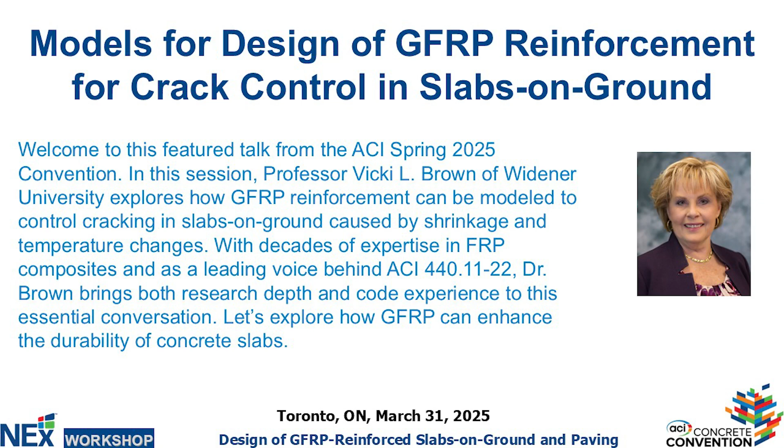I have got to confess two things. Okay. First of all, I am no expert on slabs on ground. I am also no expert on cracking in concrete. So design of GFRP reinforcement for crack control in slabs on ground. What in the world is she doing here today is probably what you're asking. And I kind of wondered myself too.

But what I want to try to do is maybe provide some food for thought, some ways to think about what we have, what we know about use of GFRP reinforcement, and I will admit having some knowledge in that subject, and how can we take what we know about GFRP reinforcement and apply it for crack control in slabs on ground.

There are examples out there. There hasn't been a lot of definitive work done to quantify what we're seeing, though that is starting to change. And I think that maybe you had a speaker this morning who addressed that a little bit.

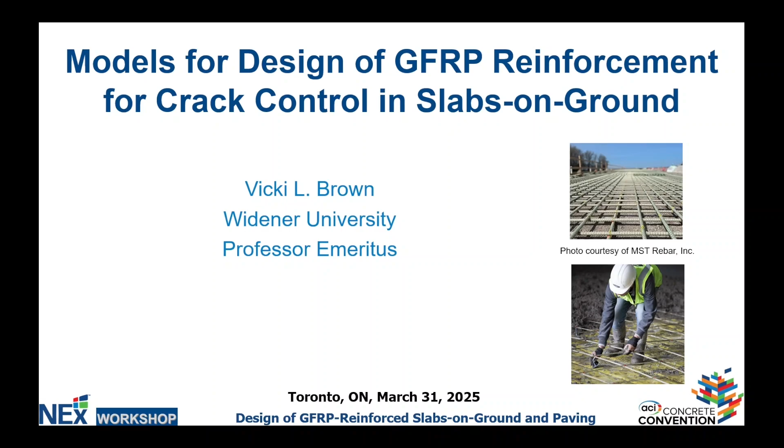Let's see if I can get this to work. Which way does this go? Am I holding it wrong? Hold on. Oh, that's the pointer. You know what? It'll be easier for me to just work from here. Which one? That one. That's counterintuitive for somebody who's left-handed.

Okay. So the first thing I'll say is, not being an expert on slab on ground, where did I go to the experts? And the expert knowledge is in 360, the ACI Guide to Design of Slabs on Ground. And I am going to be fairly narrowly focused here. I am looking at material related to unreinforced slabs, where we want the cracking to occur beneath the saw-cut contraction joints, or where we're maybe lightly reinforcing, and by lightly, 360 says maybe 0.1% steel across the joints to enhance the aggregate interlock for load transfer effectiveness.

And then I'm also going to look at those slabs that they categorize as being reinforced for control of crack widths. And those slabs are designed to remain uncracked under the design loads. The guide recommends reinforcement maybe in the neighborhood of 0.15% steel with closely spaced contraction joints, but they don't want the reinforcement to be continued through the joints because that can tend to, especially with steel, with its high stiffness, lead to cracking in other locations of the slab. And right there I point to where maybe we have one advantage with using the GFRP reinforcement, because we're not going to provide that same stiff resistance.

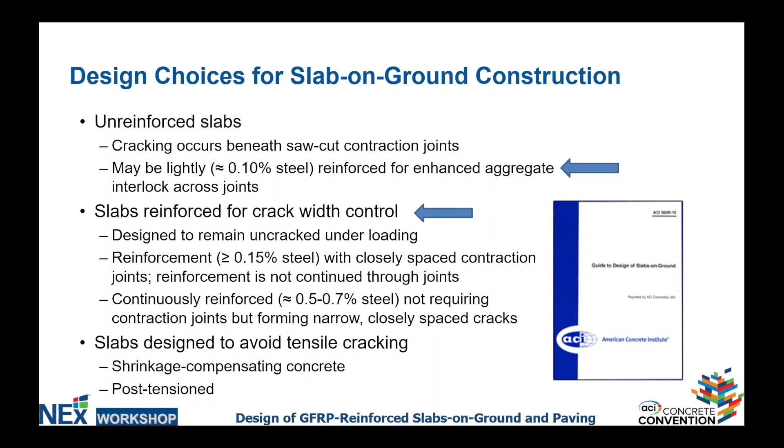I'm also going to look at what they call continuously reinforced slab, where PRC 360 suggests 0.5 to 0.7% steel, okay? This would be slabs on ground where you're not requiring contraction joints, and you provide the reinforcement to form narrow, closely spaced cracks. So that's kind of where my focus is today, where you see those two blue arrows. And I wanted to take a look at what guidance we have from our code, 440.11, and from the 440.1 guide on use of FRP reinforcement to come up with maybe a suggested approach for how we can address control of cracking in these slabs on ground.

A couple things here. Looking in what PRC says, I think it's important to note that the 360 guide makes clear that properly placed reinforcement, even when it's used in suitable amounts, is not going to eliminate cracks, okay? The idea is to reduce crack widths to what are acceptable levels, and the 360 also makes clear that joint spacing, slab thickness, and the reinforcement requirements fall on the designer. Those are the designer's responsibility.

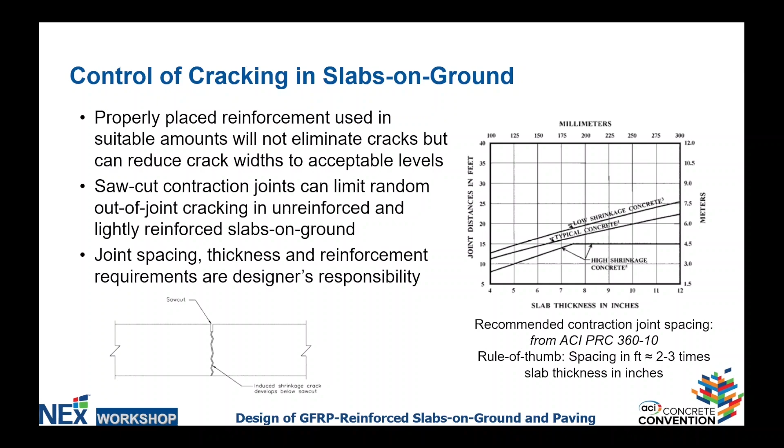To aid the designer, they provide now in the 360 guide the little chart I have shown here that indicates that depending upon what your slab thickness in inches would be, and that would be chosen based on your design loads to make sure that you don't crack your slab under those loads. Once you've done that, one can figure out then, depending upon the type of concrete you're using, slab thickness, about what spacing you need for your joints. Used to be they provided a rule of thumb that said, hey, joints should be spaced in feet, about 2 to 3 times the slab thickness in inches.

Some other guidance from the 360 guide. Note that if we're talking about reinforcing for crack control, that reinforcement should be placed in the top of the slab. In fact, I think they say upper third of the slab. The use of bottom reinforcement may actually increase the cracking that we see because it's going to create additional restraint in the bottom of the slab.

They also note that your load transfer effectiveness by aggregate interlock, okay, it's going to be inversely proportional to the width of the joint opening and the load magnitude, but directly proportional to slab thickness and going to depend upon square root of the subgrade modulus. The suggestion in the 360 guide is that if your joints are limited to about 25 to 35 thousandths of an inch, 0.6 to 0.9 millimeter, if that's the biggest your joint openings are, you should be able to efficiently and effectively transfer your load by aggregate interlock under most conditions.

A caveat to avoid continuing larger percentages of reinforcement across contraction joints. An example of this would be using the 318 0.18% temperature and shrinkage steel requirement. If you continue that through your joints, you may experience random out-of-joint cracking because that reinforcement coming through the joint is going to restrain your joints from opening, and the cracks are going to form, but they're going to end up forming maybe somewhere where you don't want them to form.

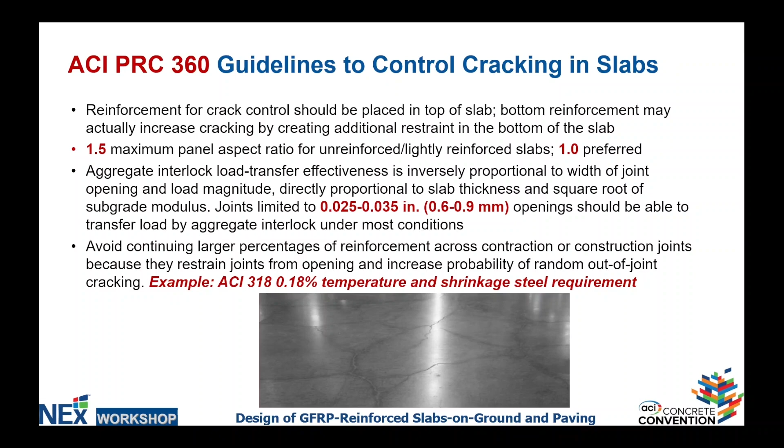All right, some other recommendations that we get out of 360. I found it interesting, and jumping ahead a little bit, the 440.1 guide for use of FRP reinforcement has an appendix for slabs on ground. And that appendix makes use of the traditional subgrade drag formula, SGDF, but I find that it no longer shows up in the 360 guide recommendations.

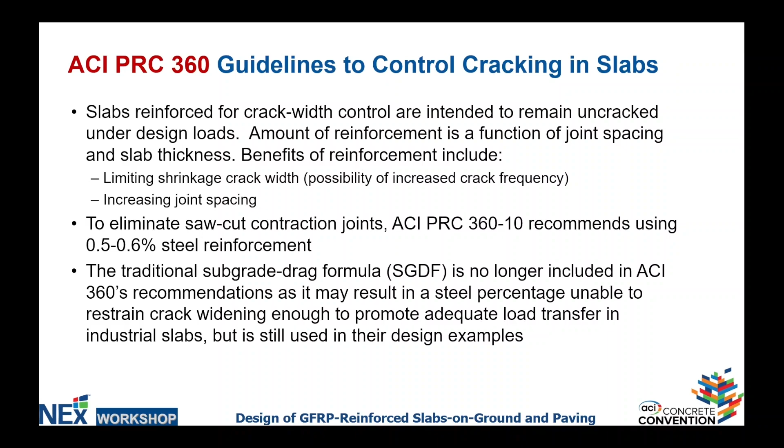The explanation I was given for that is because it may result in steel percentages that aren't able to restrain crack widening enough to promote the load transfer we need. But yet, when I look at the design examples that are in 360, all the design examples are based on that subgrade drag formula. So go figure, I don't have the answer to that one.

Where I get my information, by and large, comes from these documents: the 440.11 building code requirements for structural concrete, and the 440.1 guide for the design and construction of structural concrete. The first one, the code, is limited to GFRP bars solely. The second, the guide, covers other types of FRP bars as well. And the guide includes additional background in an appendix with recommendations for using FRP reinforcement in slab on ground.

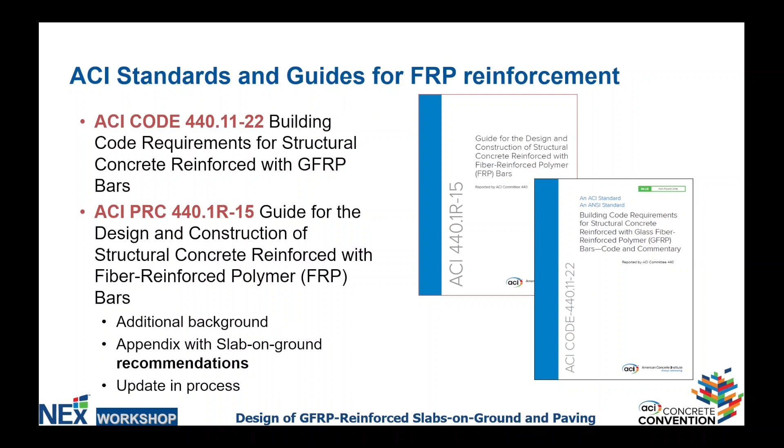That guide is currently in the process of being updated. I cannot tell you what's going to happen to that appendix when that update is completed, whether it remains, changes, or goes completely away. The other thing I point to briefly is that the nice thing is that ACI code 440.11 is now in the International Building Code in the 2024 version of it.

But please note that 440.11 is very specific that it does not cover slabs on ground. And we see that there in the 1.4.8 provision: this code does not apply to design and construction of slabs on ground unless the slab transmits vertical loads from other portions of the structure to the soil.

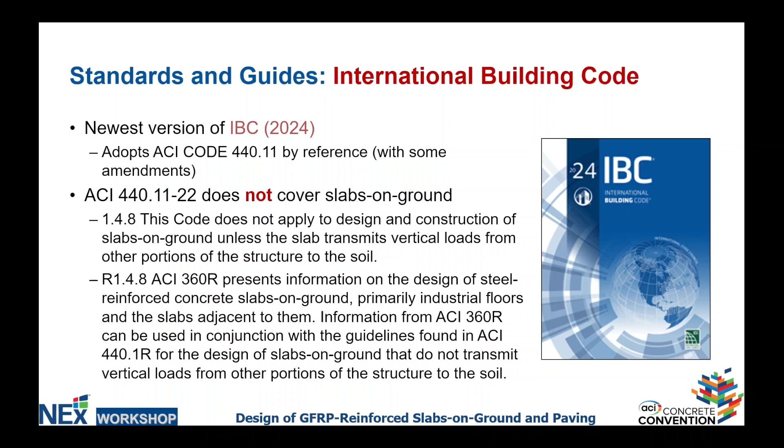So it's not part of the building code requirements, but that doesn't necessarily mean we can't borrow things from it to address what we're trying to achieve with slabs on ground. And in fact, if we take a look in the commentary, 440.11 points you to the ACI 360 guide for slabs on ground that can then be used in conjunction with the guidelines found in 440.1 for those designs. So what information can I get out of the code and the guide?

And I'm first of all going to go look at that shrinkage and temperature reinforcement, okay? Because when we apply it in beams, one-way slabs, structural slabs, we're using it with the intention of limiting our crack width. The reinforcement ratio we use is right here, that's equation 24.4.3.2. There's the reinforcement ratio with GFRP reinforcement.

If I'm using the lower modulus bars with an Ef out of 7957 of about 6,500 ksi, I'm going to get a reinforcement ratio of about 0.003 from that. If I'm using higher modulus bars, that's probably more like about 0.0023, to give you some context for how big that ratio is. And we do apply it to the gross concrete area, as is done with the steel reinforcement ratio for temperature and shrinkage resistance. Here, though, bar spacing is limited to the lesser of 3 times the slab thickness and 12 inches.

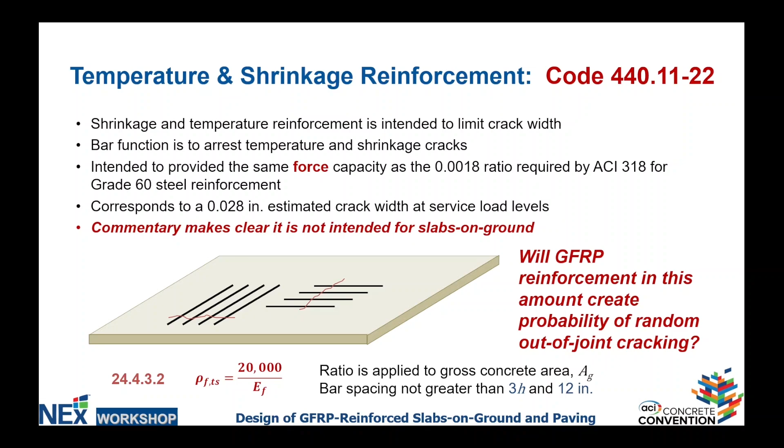The question that we need to answer, and I don't know that it's been totally answered yet, is will GFRP reinforcement in this amount create the probability of random out-of-joint cracking when you put it through the joints, the way steel reinforcement at 0.18% will do? No definitive answer yet, but from the couple of studies I've seen, there certainly is the possibility that the answer to that will be no. We're going to get the cracking where we want the cracking, which is in the joint.

Another equation we can get from Code 440.11 that will be helpful to us is how we space our GFRP bars for crack control. If we take a look, these equations here, 24.3.2a and 24.3.2b, come right out of Code 440.11. They have been calibrated to provide a 0.028 inch, or 0.71 millimeter, maximum crack width. Now those coefficients, the 0.032 and the 0.026, can be linearly adjusted to impose a more restrictive limit if the designer felt it was necessary.

The 0.032 actually comes from 1.15 times the maximum crack width you want to accept in inches, and the 0.026 is from 0.92W. So this equation could be adjusted. I don't think I would adjust it higher. I don't think I'd make my crack width bigger than that 0.028 inches, because remember, we want to maintain aggregate interlock. But if you wanted a tighter design, they can be adjusted downward.

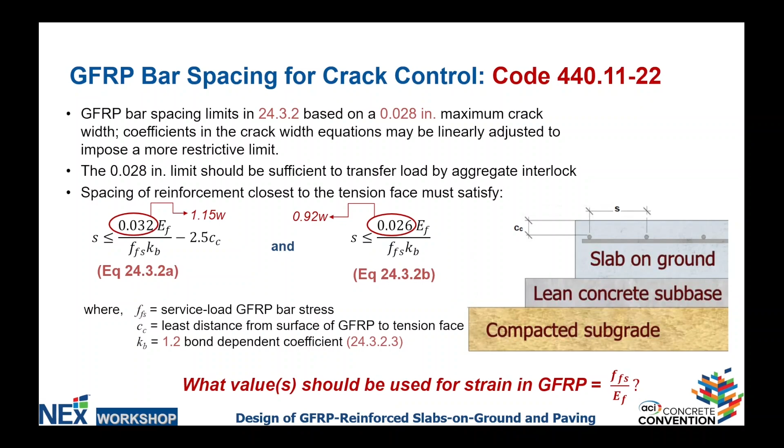What else do we have in this equation? We see what looks to be the service load GFRP bar stress. We've got to decide what that is. But in reality, we don't really have the bar stress there. If you take a look, the numerator has the tensile modulus and the denominator has the bar stress. So in effect, we're dividing by strain in these equations, which brings the next question. What value should we be using for strain in the GFRP if we want to use this to control shrinkage cracking in our slabs on ground? What value do we go with?

There are several different recommendations that one can look at. We want to limit that reinforcement strain, and the approach that was taken in both Code 440.11 and in the ACI 440.1 guide for FRP reinforcement is to limit that strain to 0.0012. Where did that come from? It corresponds to the strain you'd have in steel when that steel is at a service load stress of about 0.6 Fy, and typically when we're designing with steel, we'll say stress in the steel under service loads is going to be around 0.6 to 0.67.

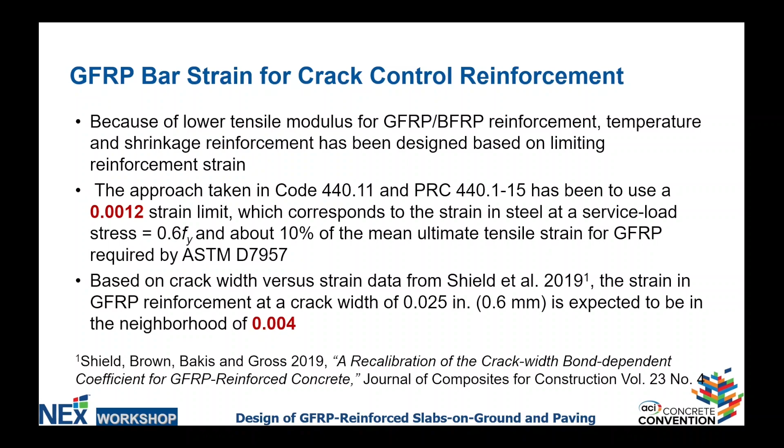So that's one choice. The other choice would have a much larger strain that could be used, and I wouldn't recommend that without there first being additional test results to back it up, but the strain would be expected to be in the neighborhood of 0.004 if your crack width is at 0.025 inches.

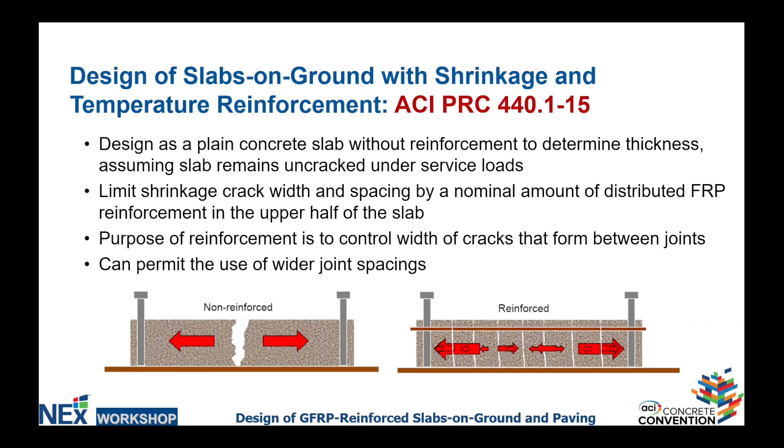And then if I get into what we've got in the guide, the equation they use is the subgrade drag formula, which looks something like this. If I adjust that with a strain of 0.0012, assuming a coefficient of subgrade friction that's recommended at about 1.5, I get an expression for the area of reinforcement I want to use to control shrinkage, what we see here with a coefficient of 625. If I use that 0.004 strain, that coefficient would be much smaller.

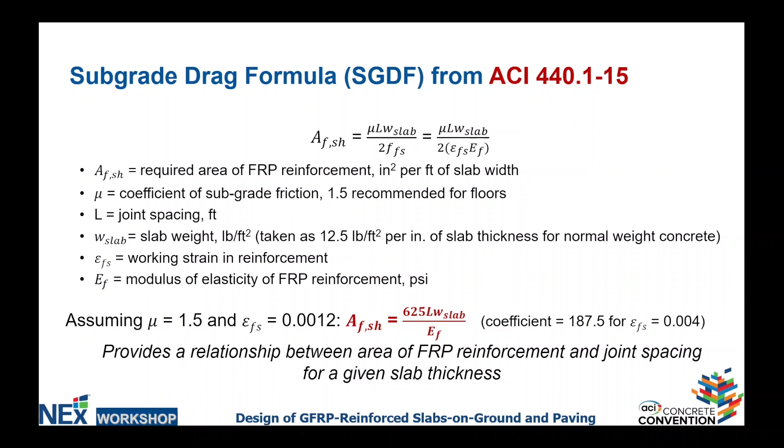So what can I do with this? Well, I think it provides for us a relationship between the area of the FRP reinforcement and joint spacing for a given slab thickness. If we were to take that 625 area, convert it to a reinforcement ratio, and set it equal to the temperature and shrinkage reinforcement ratio from the code for GFRP bars, it implies that FRP reinforcement in amounts equal to what is specified in Code 440.11 might be usable for slabs on ground with joint spacings up to 30 feet.

Now that's great, right? We can space our joints further apart, we cut down on maintenance costs. But I would say that if that were to be done, that reinforcement should be chosen so that the bar spacing limits I showed on the previous slide for crack control are not exceeded. I will note that this is all speculation at this point on my part. We need the experimental data to validate this approach, but from what I'm seeing starting to show up in publications, I don't think we're too far from being able to quantify an approach like that.